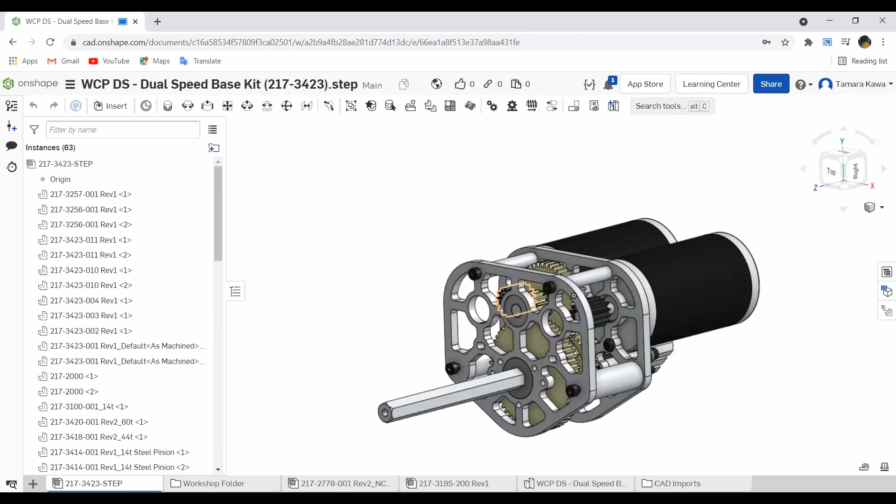Now, no need to panic. We're not going to be assembling the entire gearbox. That is a lot of parts. And given the fact that you're veterans, you all know how to do mates. I don't want to have you do the same planar and cylindrical mates over and over again. We're just going to be looking at assemblies overall here. So with that, you all have that folder where you made your plate, and we're going to be making an assembly now.

All right, so your assembly layout, you'll notice it's going to look something like this. You'll have things like the mate connector, you'll have your main mates. You'll also have this sort of gear relation here, you'll have slider mates. Keep an eye on all this. And another thing of note is you do still have the measure and the mass properties, but you're also going to have these 3 new tabs, the BOM table, configuration panel, and exploded views.

We're going to be looking at all of those today because, again, while I do want you to get practice with mates, I also want you to look at this workshop as a means of how we're going to organize things on the team. So with that, the first thing I want you to insert is the plate that you made. Again, completely okay if you don't have all the cutouts. As a matter of fact, I might even suppress mine since it's a lot to look at. The main thing that I really want you to have is these 4 holes for bearings and these holes for motors. Everything else, you don't need to worry about it. We just need these holes for now.

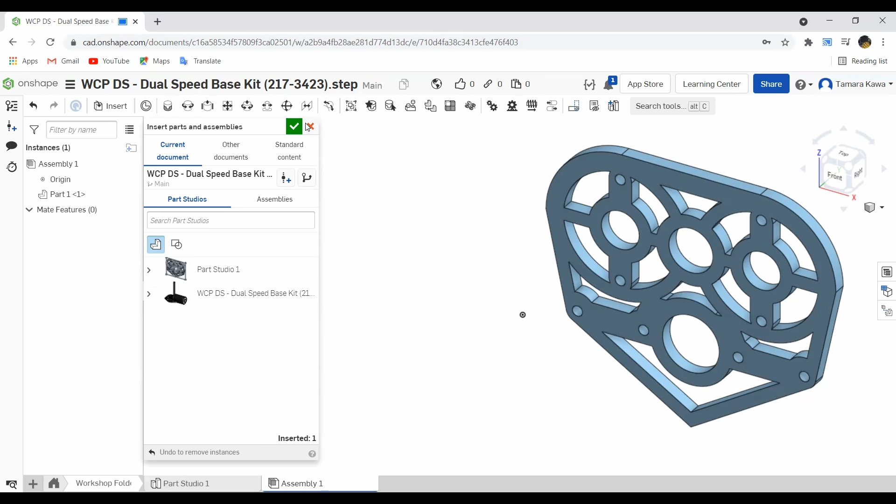Oh, also, as you notice, I'm a very bad CADder and I didn't fillet any of my sharp corners. So as you can see, this would not pass any sort of stress concentration reduction test. Like this is desperately in need of filleting.

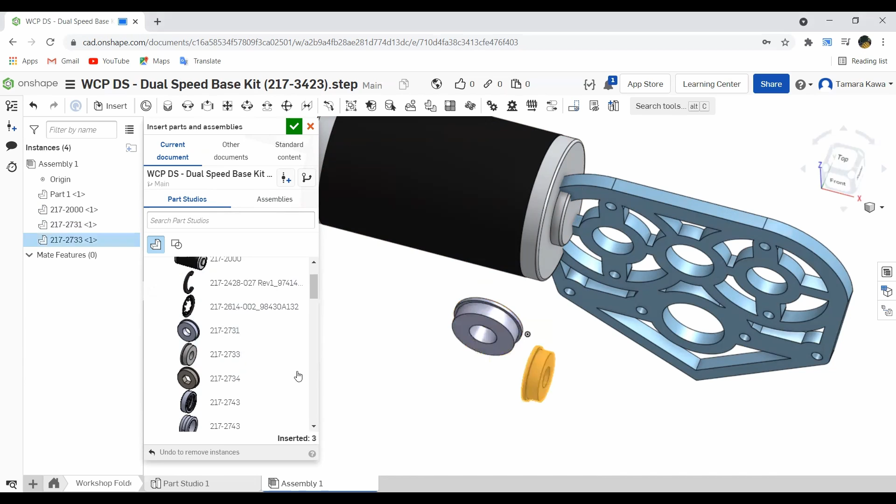But anyways, the other parts that you'll want to insert are going to be a motor. Again, we're not doing a full assembly, so just one for now. Let me check what else. You'll also need these 2 bearings over here, 2731 and 2733. All right, another thing for all of you to import are the gears. So the 30 tooth, 42 tooth, the 44 and 60 tooth, and the 14 teeth. Oh no, there's one more, because there's 2 14 teeth. So yeah, just import those and then you can leave them to the side or something. But just make sure you have everything loaded in.

Yeah. Sure. Right. Of course.

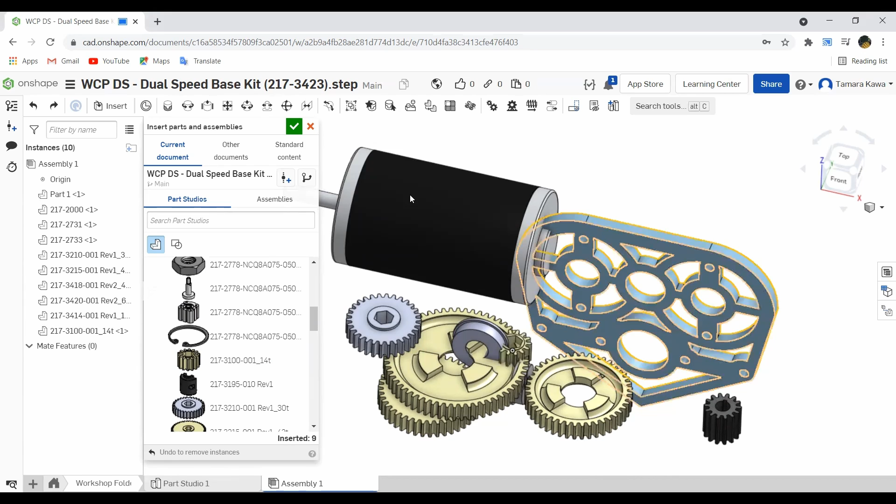So you just hit insert and then go down to West Coast Products DS dual speed base kit, and then you just click them in. So motor, these 2 bearings. I guess for now, leave it like that. I'm just going back and forth. So yeah, just remember to sign in.

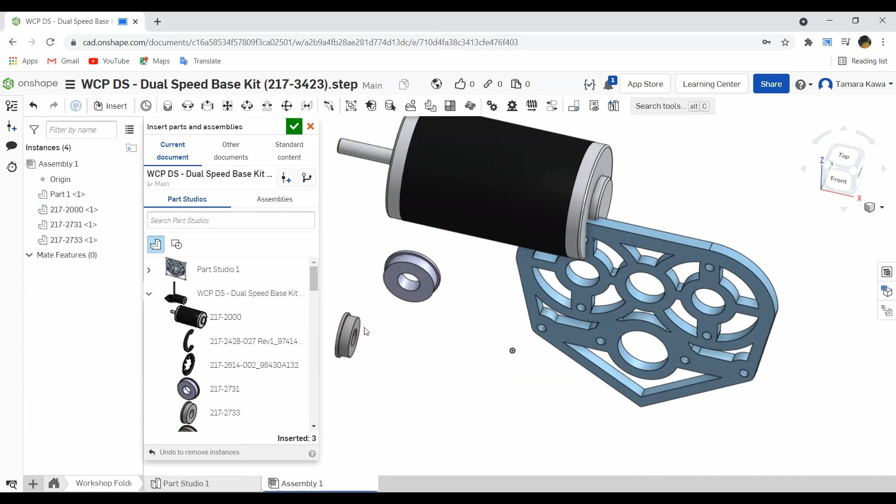Oh, one more thing I want you to do is once you have your parts imported, I want you to create a fastened mate between this gearbox and the origin. Actually, you know what? Why don't you discuss what point of the gearbox do you think would be good to constrain to the origin? Yeah, a lot of times, Onshape does take a bunch of resources. So if you have other stuff running in the background, it's good to close them.

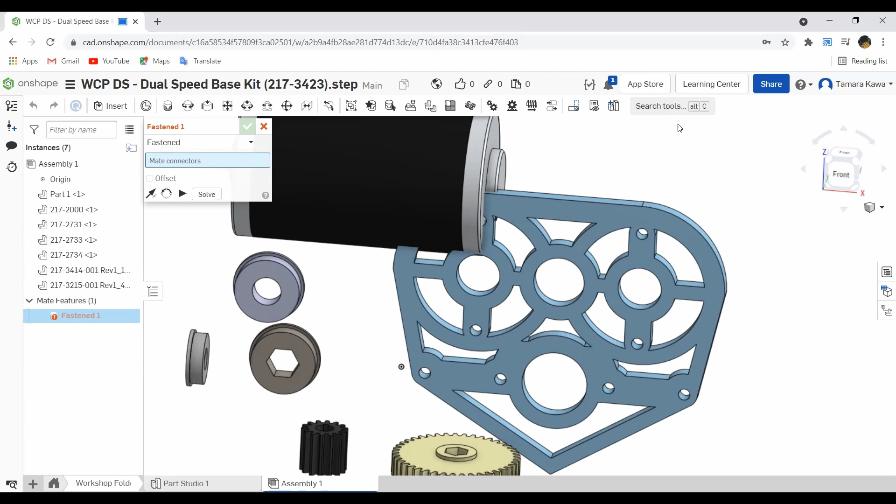All right, so any suggestions for what part of the gearbox do you want to fix to the origin? Sure. So we could do this top hole right here. It's the one for the center shaft. Okay. So I am going to go ahead and fix the center of that top hole to the, might need to rotate a little bit. I'm going to go ahead and fix it as such to the origin.

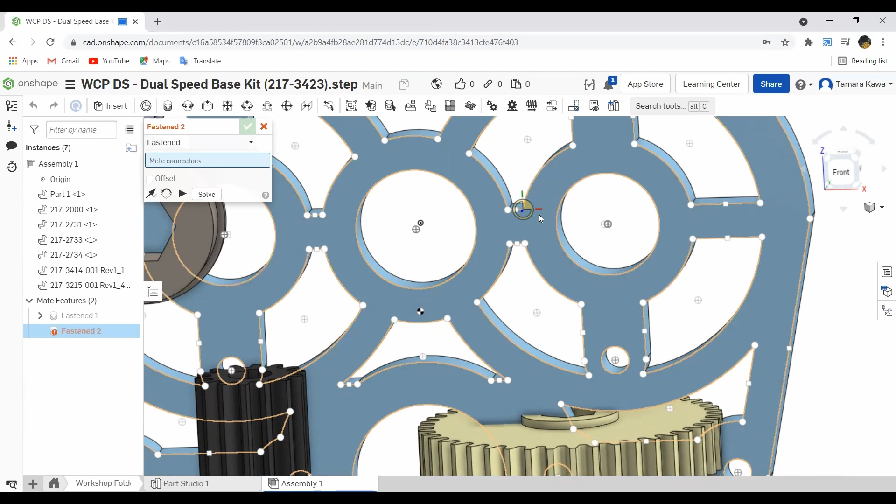So for now, I'm just going to leave it as fastened because in this case, the gearbox plate is rigid. The gearbox plate isn't supposed to be moving, it's supposed to stay in that position. And in this case, because a lot of the mates we're going to be making are going to be moving, we do want at least one thing to be static in place, not going to move.

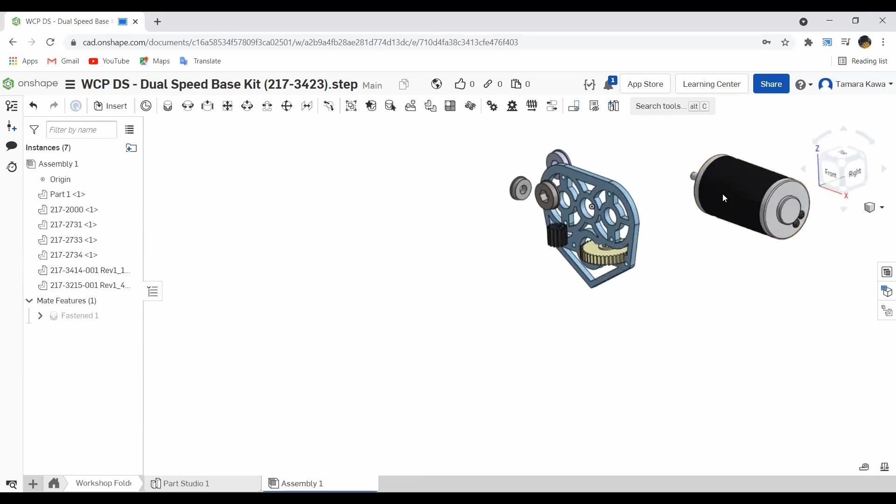So now that you have this fixed, another thing we're going to now mate is the motor. So do you think that the motor can be fastened, or do you think we need to do anything different with the motor? Right now, everything is just sort of freely floating in space. And oh, I forgot to tell you to import the shaft. That's okay, we'll do that now.

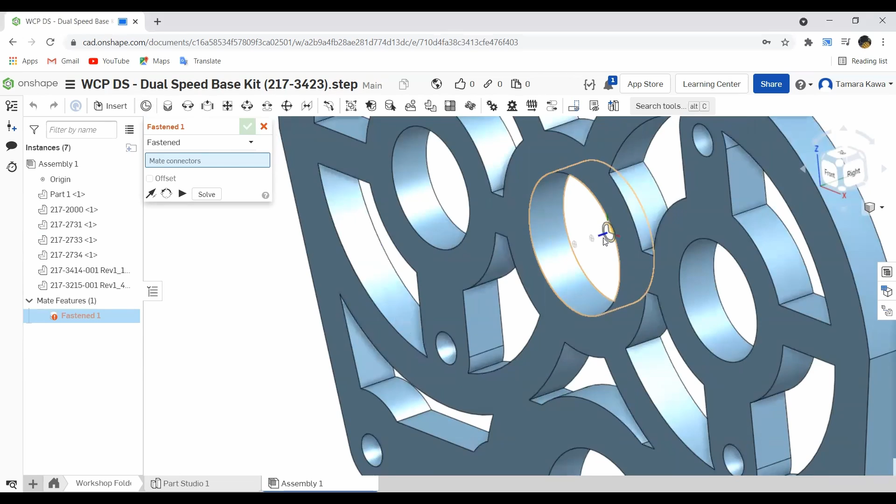So for now, I'm going to say fastened, and I'm going to sort of hover over. Yeah, because in this case, we want something to be rigid or fixed. So we can start with this plate. Yep, and then we'll sort of mate it to the center. Oh, okay. And yeah, there you go. And again, the reason we're picking this gearbox plate is because a lot of what we're assembling is going to be assembling to the plate. So it makes sense that this is the piece we're selecting to not move, be rigid, et cetera.

It'll change your axes, but otherwise it should be fine. Yeah, so just note that if I say, for me, the offset might be a Y offset for you or something. So just keep that in mind when you're orienting yourself.

Yeah, pick the top center hole, because even when we designed this part, we designed using that as our relative center. So now we have this motor here, and we have a gear that's going to attach to it. So let's mate the motor into place.

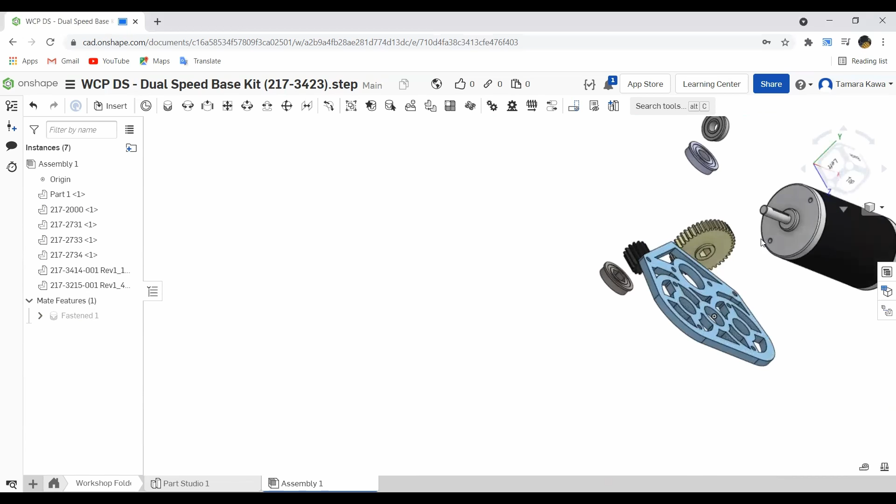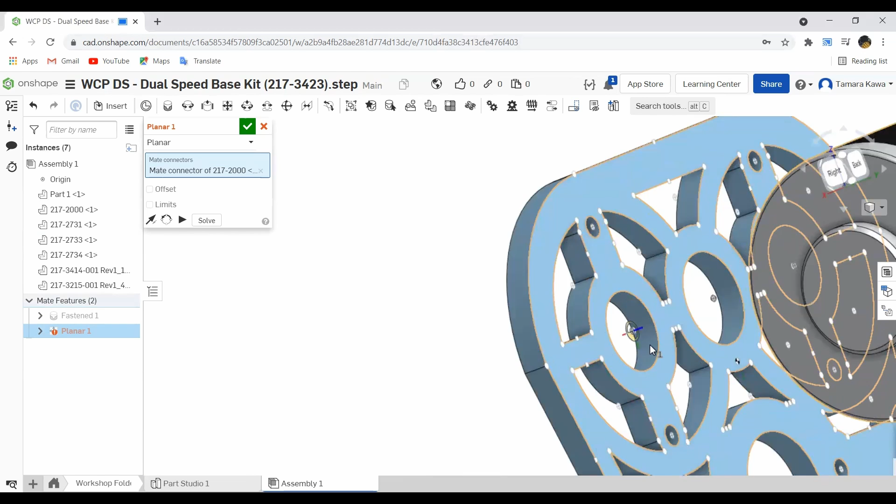Because we do kind of care about the orientation of the motor, I am going to say try to avoid using fastened mates, because again, in this case, we do care about the orientation. So we'll start with the planar mate, and we'll mate this surface of the motor to the outer surface of the gearbox as such. Hold on, it's moving on me. Okay, let's look at that.

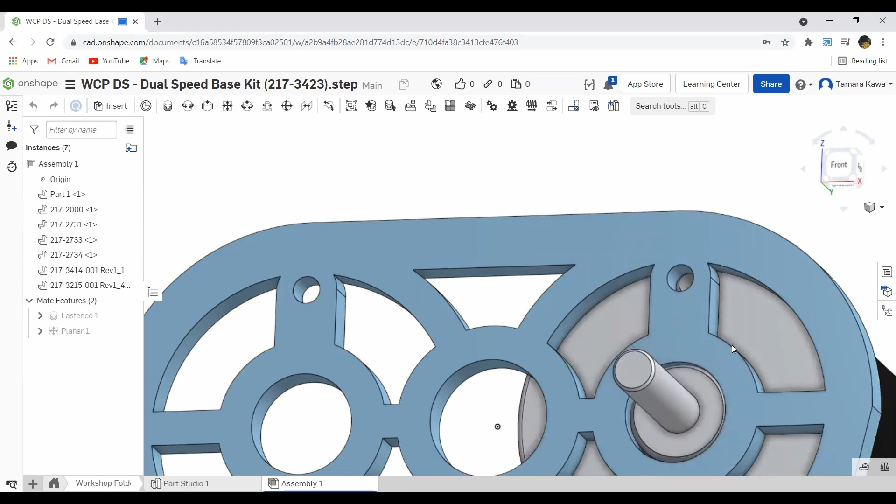And you'll notice that it's kind of snapping to the wrong side, so you can just use the arrow to flip the orientation and then hit the check mark and you're good. However, it is also not quite in the position we want it to be in, but you will notice that when you move it around, it's still moving while being in contact or at least coplanar with that surface. So now we're actually going to mate this so that it's in the orientation we want. To do that, we're going to start using cylindrical mates.

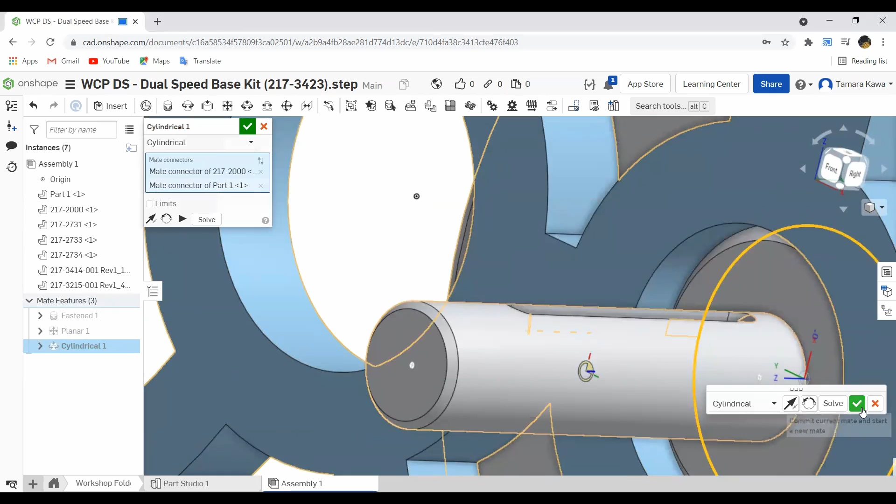The first one we care about is going to be this center part of the motor. We want that to be cylindrical with this surface right here. We want it to be centered with it. So that should be nice and centered now. But the other orientation we care about are these holes for the motor right here, because these need to be bolted in, right? So we're going to do the same thing.

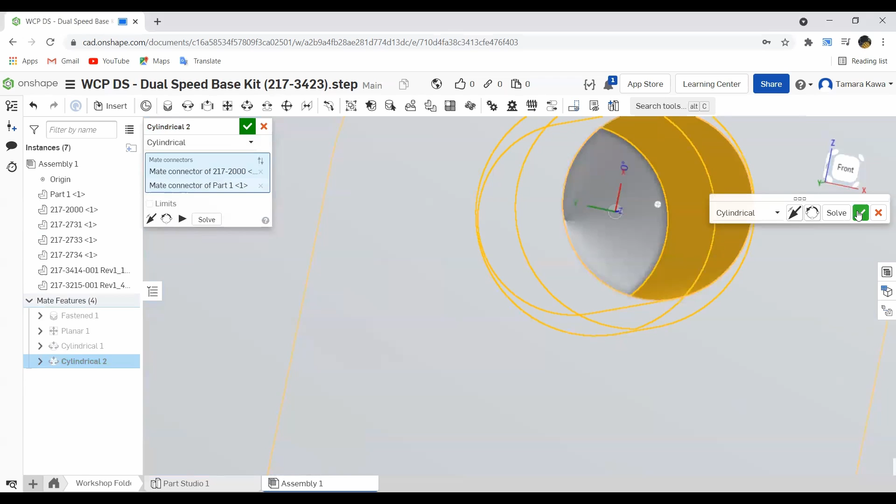We're going to create a cylindrical mate and mate it to the inside of this hole we created right here. And now those should be lined up. And if you hit the check mark and exit out, the motor is now fully fixed. It can't rotate, it can't translate. It is centered on that hole and the motor holes line up.

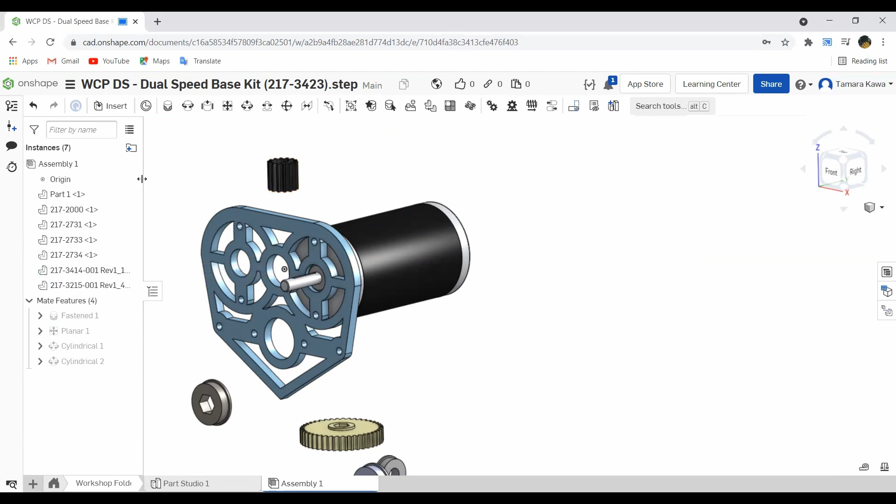What you should have right now is this gearbox plate should be fastened to the origin, and you should have a planar and two cylindrical mates so that the motor is sort of centered on these two holes of the gearbox plate. So next we're going to add this 14-tooth steel pinion gear. When you highlight over here, it should say 217-3414, 14-tooth steel pinion. That's the one. And we are going to mate that to the motor.

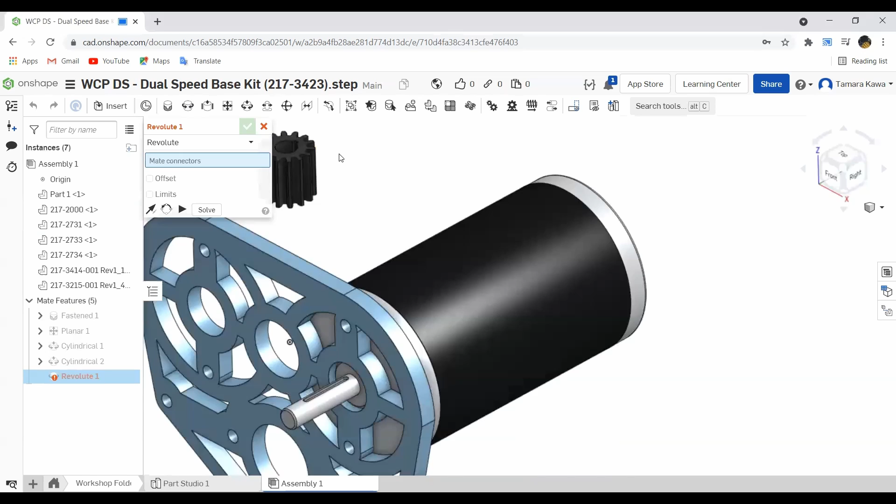But we do want this to spin, right? So if we just do a cylindrical mate and a planar mate, it's going to think it's rigid. That's not what we want. So we are going to do something called a revolute mate. And we're going to kind of go over the center as such, and we'll select this motor shaft as well, and it will snap to that position and placement.

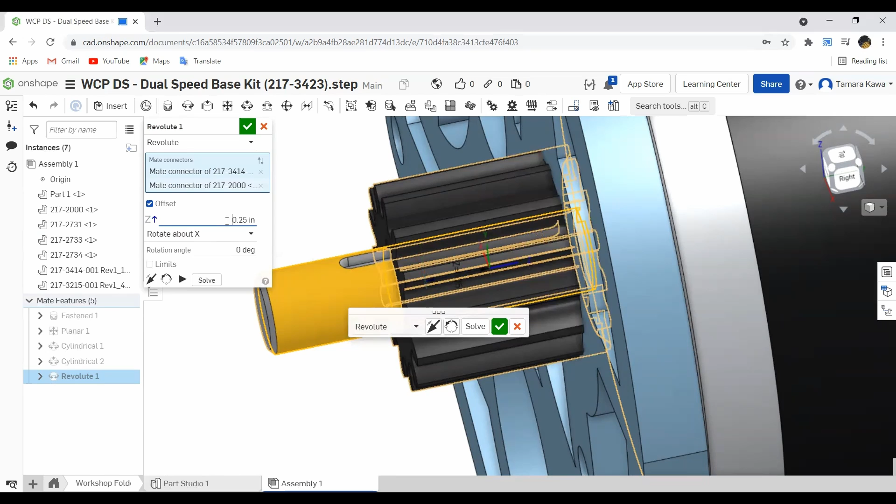Let's say I kind of want it to go a little bit forward. I'll select offset, and again, for me, it's the Z-axis. If you selected a different face of the origin, then you might have something different. I'm going to say 0.25 inches for now. Oh, let me reverse the direction of that. I know it's not much, but this is going to be important for something we go over later. Just do 0.25 for now.

Oh, let me show you. So if it's 0, then it's just sort of going to be centered on the shaft like that. So I said negative 0.25 to push it 0.25 inches forward. Yes. You can do that too. I guess you can add an offset anyways. The reason I'm saying the offset is so that we can use this later on for something I want to show you. All right. So yeah, I'll just mess with my dimension as well.

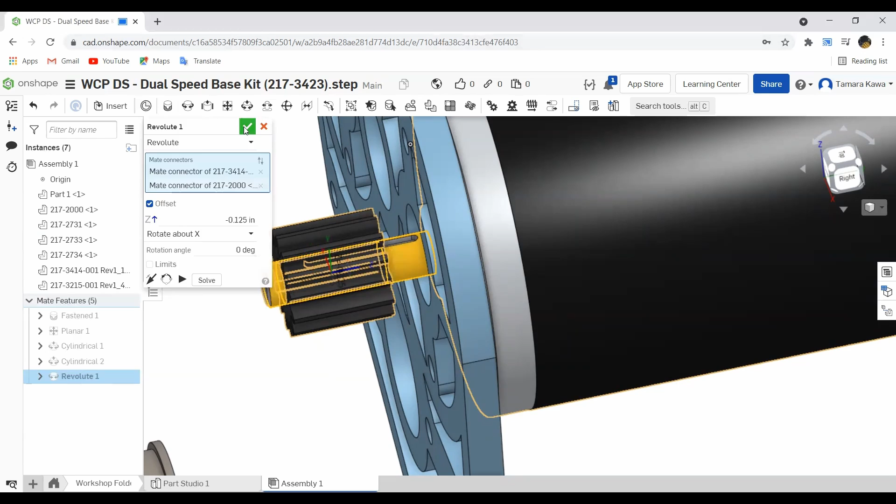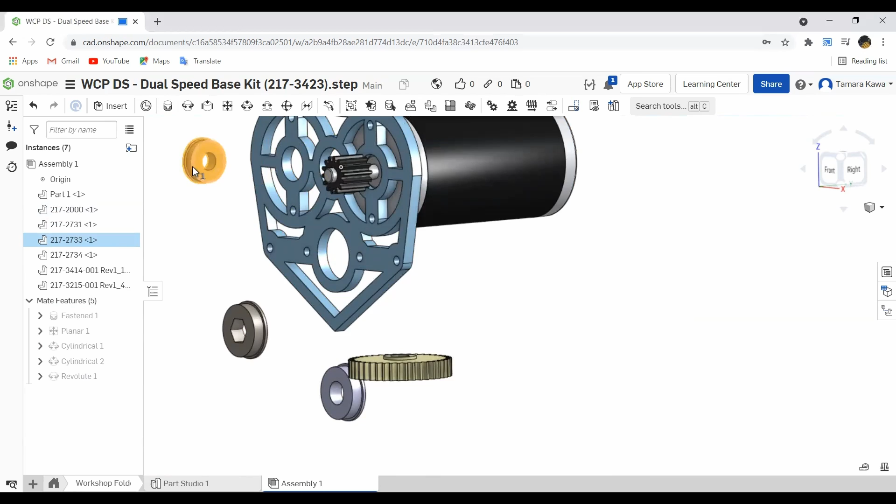All right, so you'll notice that this gear is sort of free to spin on the shaft. Normally I'd like the shaft to sort of move with the gear since there's a pin, but this is okay for now for what we're doing. So now we need to add, was it 3-1 or 3-3? I think it was 3-1. No, it was 3-3. So we're going to go ahead and move this bearing 217-2733. And we're going to mate that as well.

Now, in this case, I think we can afford to use a fastened mate, because while something is turning inside, the bearing itself isn't going to move. So for the sake of time, we'll say fastened. Again, sometimes this is actually... no. Actually, what do you guys think? Do you think we can have this be a fastened mate, or do you think we should do planar and cylindrical?

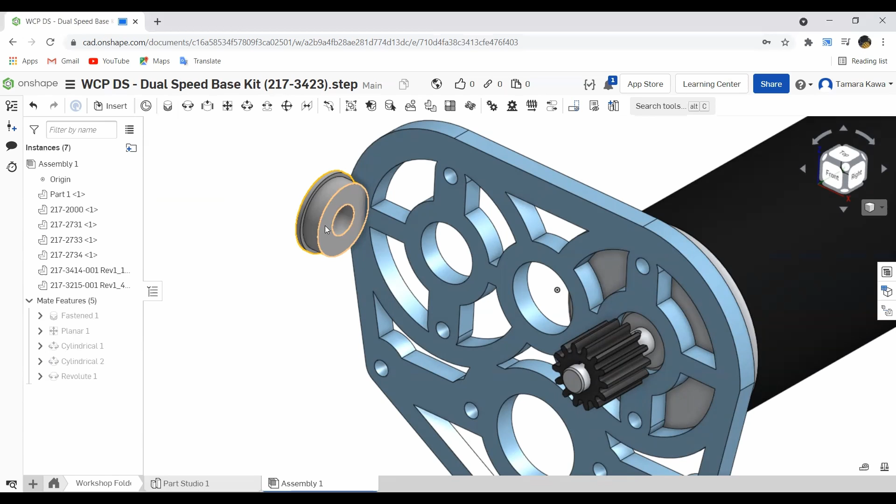Fastened is going to completely remove degrees of freedom, while planar and cylindrical would first mate this plane to that plane, and then make it so the circular surfaces are concentric. It won't be able to... So I'm glad you're asking this question, because this is a case where we could potentially just do fastened. For something like the motor, because the orientation actually matters, and because we want to make sure the holes line up, that's a scenario where I'd say don't do fasten, but for this, we might actually be able to get away with it.

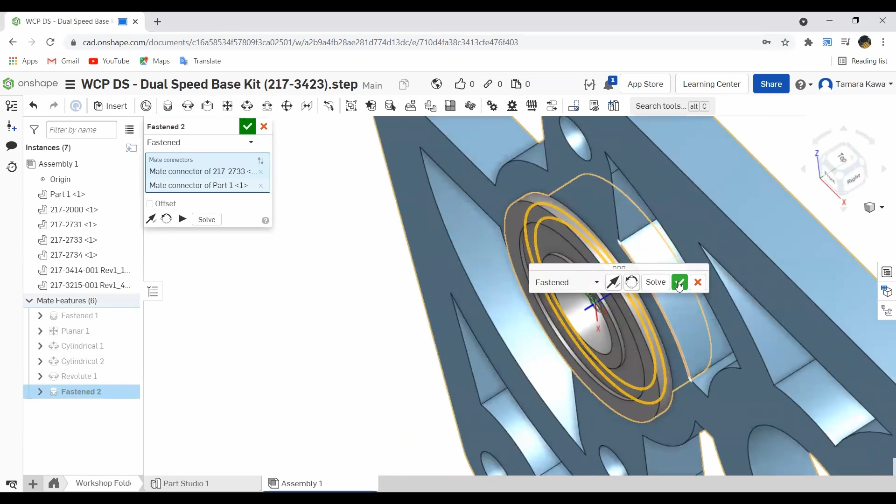All right, I will do this mate and then come to you. So I guess we'll just do a fasten for now, and I am going to fasten specifically the end since we also want some level of flushness. So I'll do this surface right here at the flange to this outer surface right here. We'll flip that rotation, and that's it. So you should have something like this for now.

Where... oh, wrong hole. Fortunately, we can go in there and change that to the correct hole. There we go, that's the right hole. So you should have something like this.

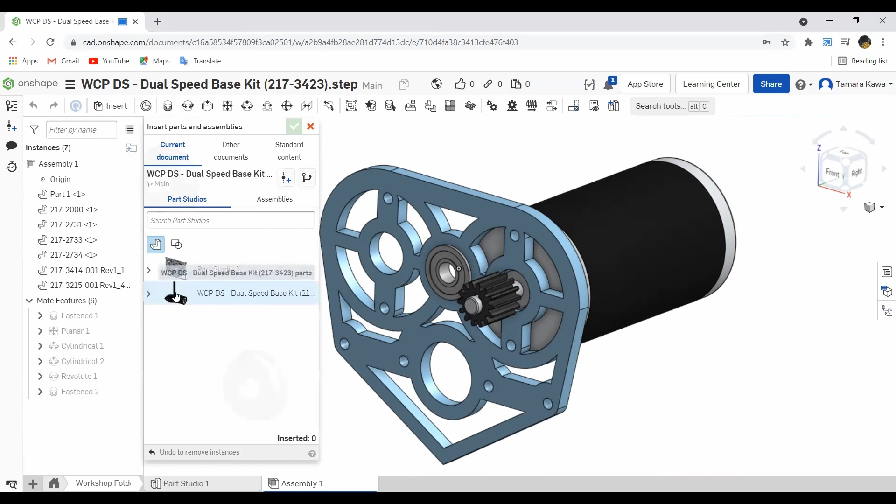All right, so there is one more thing that I forgot to have you pull in. I'm gonna have you pull it in right now. There are gonna be two shafts, I believe. That's not a shaft, we're gonna have to kind of go down. Let's check this one. Yep, this is it.

So you'll also need to pull in 2173423-002. And we'll skip the dog gear for now, that's going to be kind of a headache to deal with. And 2173423-003, just one of each. So 2173423-002 and 2173423-003. So we're going to do this next.

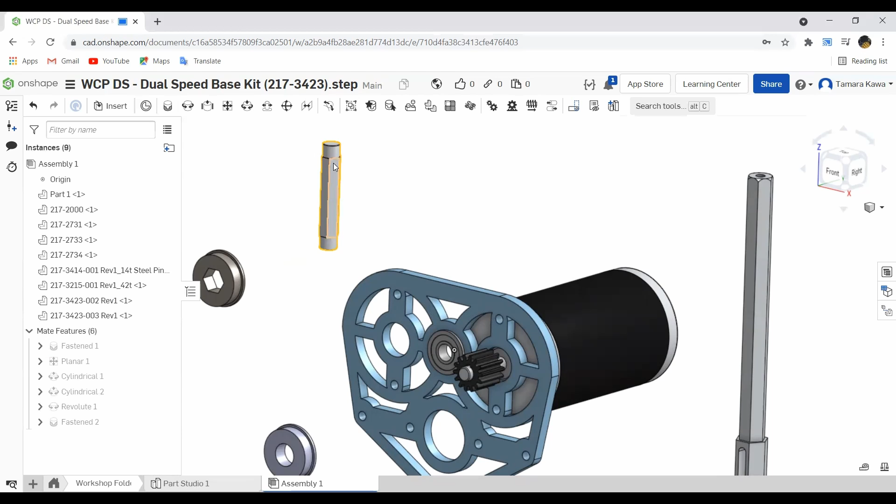We're going to do a revolute mate of this shaft, because this is a case where the shaft is actually spinning. We're going to start by doing revolute again, and this time we're going to go with this sort of interface right here, since that's what's going to be sitting, and we'll do it with this bearing hole as well. Reverse direction as needed so that the shaft is sticking out like that, and hit the check mark.

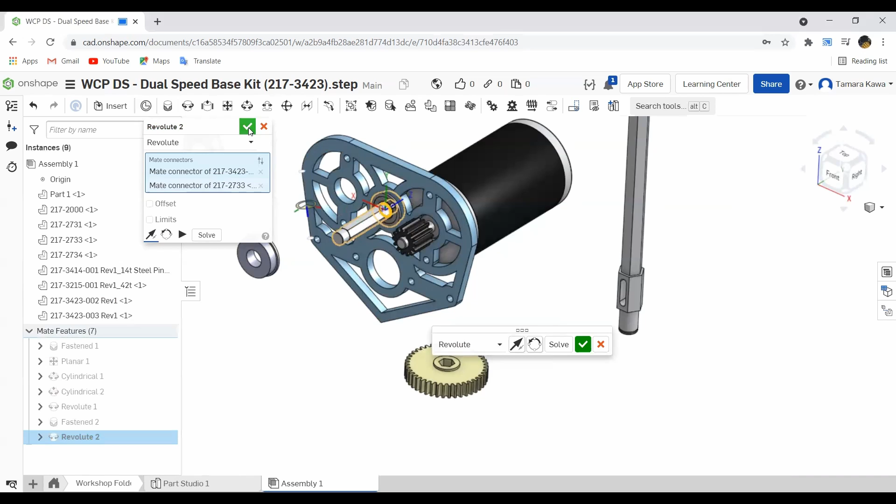Now we are going to take our 42 tooth gear, and this is going to be a bit complicated because we have a hexagonal pattern, but we are going to mate this to the shaft as well. Generally for something like this where it's hexagonal, I like to take two faces of the hexagon that are ideally touching, or just one face apart, and then mate them to corresponding faces over here.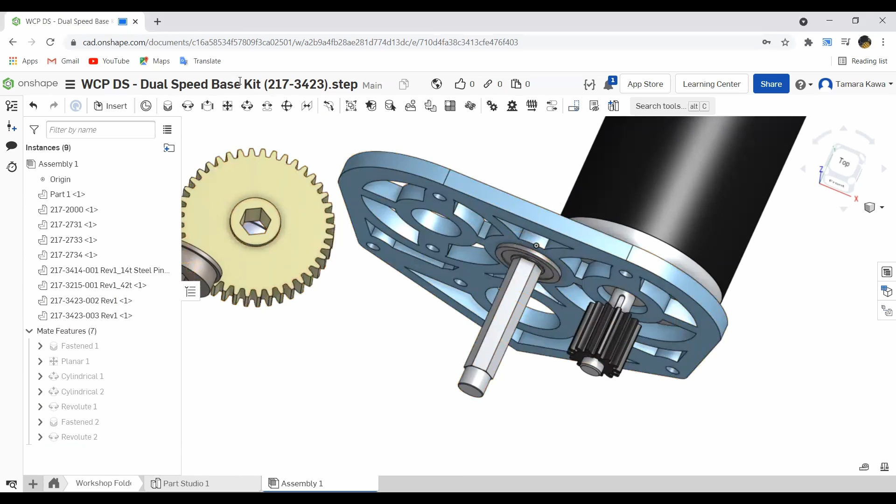Okay, so we're going to do a planar mate, and we're going to take one surface - remember which surface you picked - and we'll do the top surface of the shaft. And then hit the check mark. Oh, nope, I needed a reverse direction again. It's okay, you figure out these things as you go.

So yeah, you might need to do a lot of direction reversal. It's gonna look like it's in the right place, but it's actually not - as you can see, it's still kind of turning. So what we're gonna do is kind of drag it out like that, so you can tell what orientation you're going for.

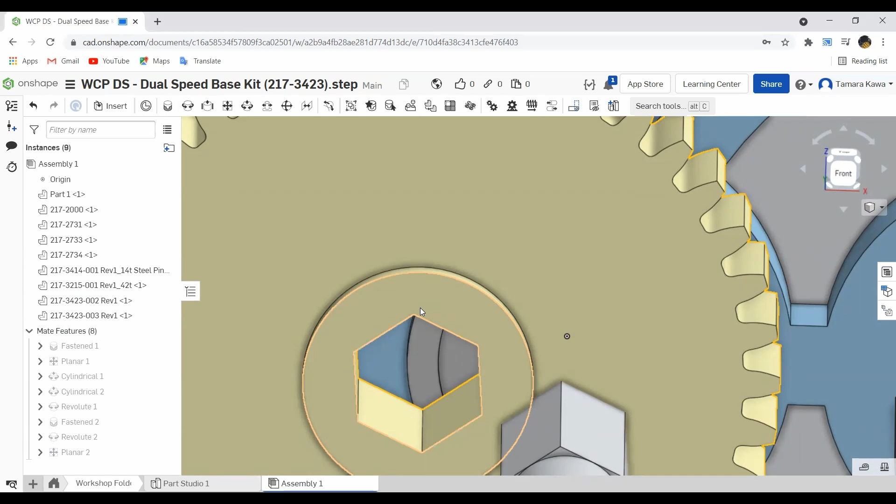For planar, I don't believe it does. I like to use the center of the plane, but if you use the edge, I think you're also okay, because so long as you're coplanar with it, you know. So based on how I move...

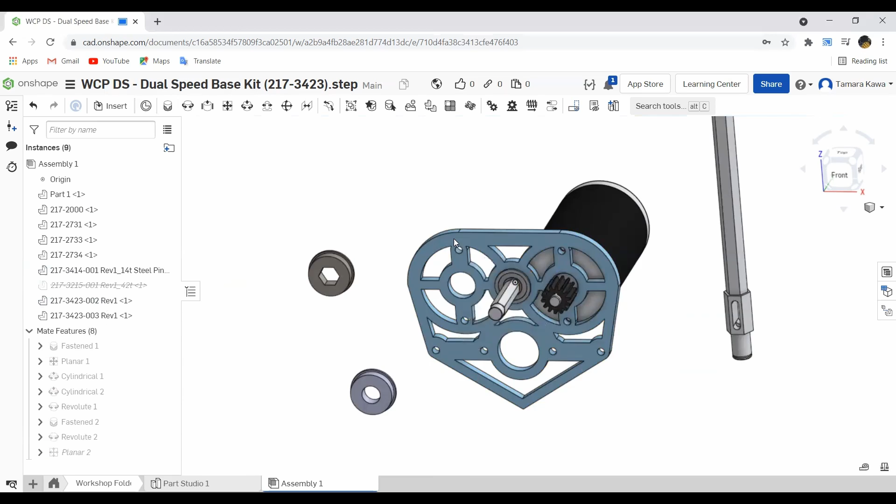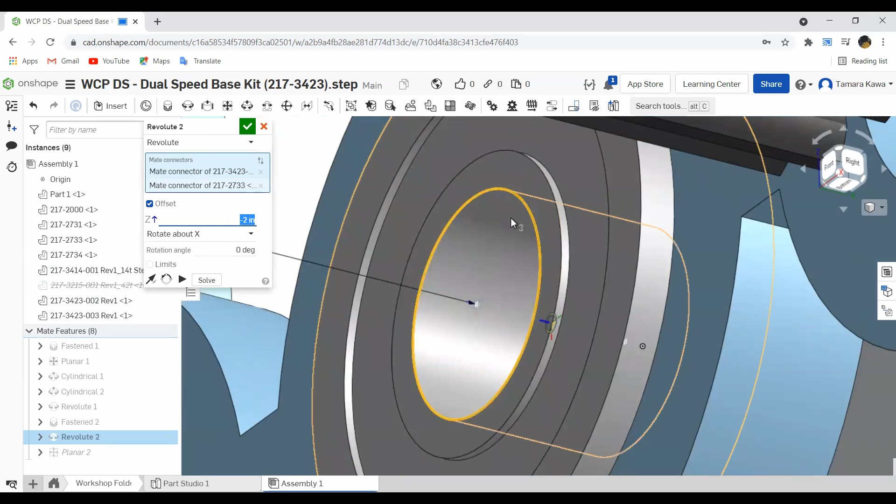So to refresh on the mate you're supposed to use, I did a revolute mate for the smaller shaft, and I specifically selected - here, I'll offset it just to show you - so I selected this face right here, the end of the hole, and I selected this face, like kind of like that, if that makes sense. So I selected the top part of the cylindrical part, and then I selected this outer part of the bearing.

All right, and okay, let me unsuppress my gear. Yeah. All right, so it is, yes - because that removes all degrees of freedom except the rotation along one axis, and that's what we want. So I'm just going to make sure I select my right coplanar, and I'm going to go ahead and select this one right here.

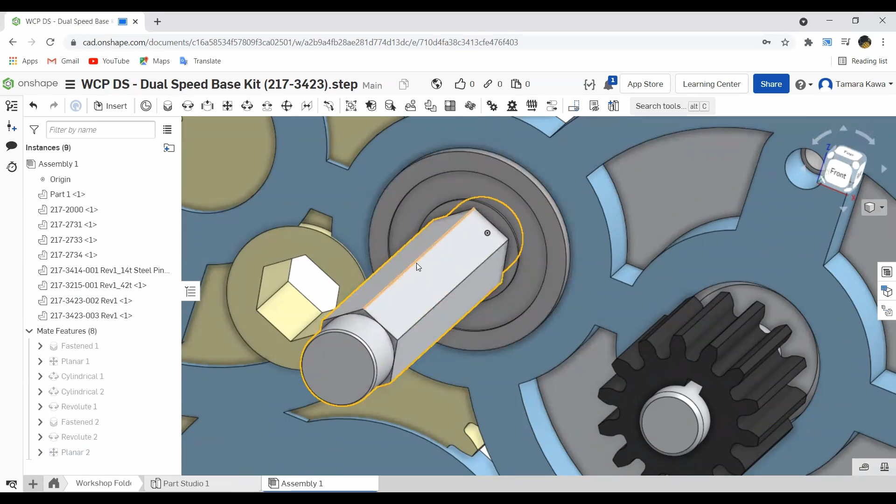To mate it to the shaft, I'm using two planar mates, so I'll show you one of them again. All right, so there we go, so just to check - move that in, yep. So these planes are already coplanar.

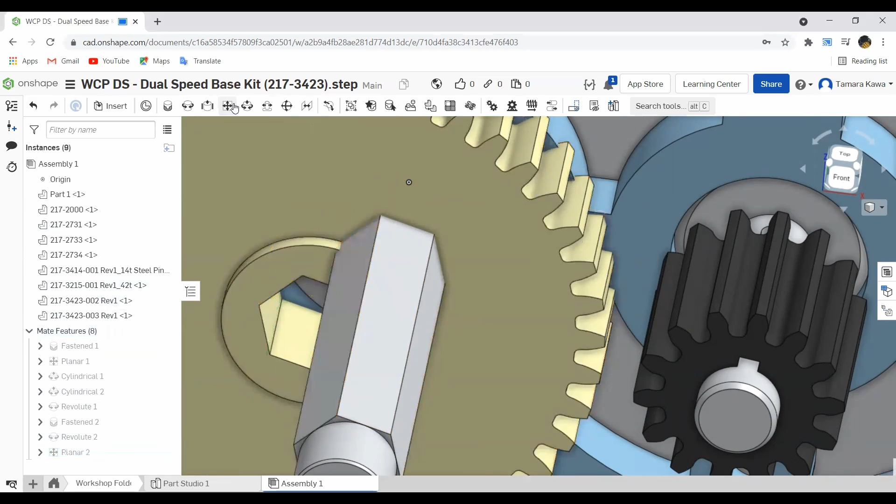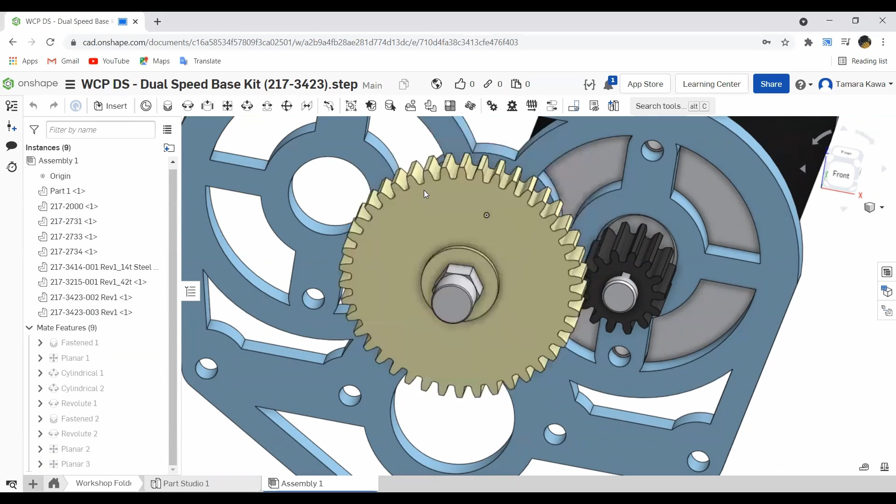So we're going to select another planar mate, but we're going to select this plane here and this plane here. And now that it's constrained by two planes, it's basically constrained in all directions except its rotation, which again we want, and the actual translation of the plane. So we're going to have these two gears be coplanar with each other. I'm just going to hover over until I get roughly to the center of the gear.

Sometimes it helps to sort of... there we go. And then I'll select this gear as well. It's going to move, that's okay, because it'll move back, and then click the check, and now they are coplanar with each other. But you'll notice that both of them are free to turn, but they don't turn with each other, right? And that's a bit of a problem, because they're gears, they do move with each other.

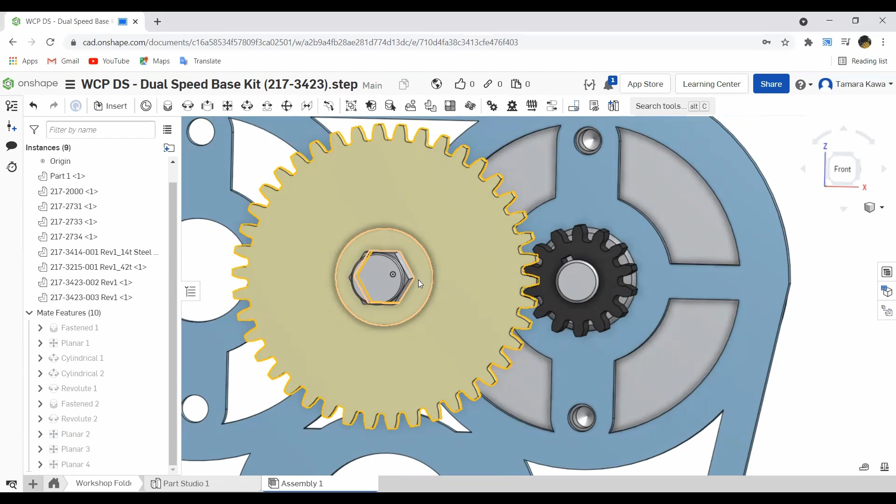So once you get to this point, we're going to add in another mate feature. Okie dokes, that's by popular demand. We're going to be redoing the gear mates here and here. Okay, so this duder is just floating around in space, and we're going to mate it into place.

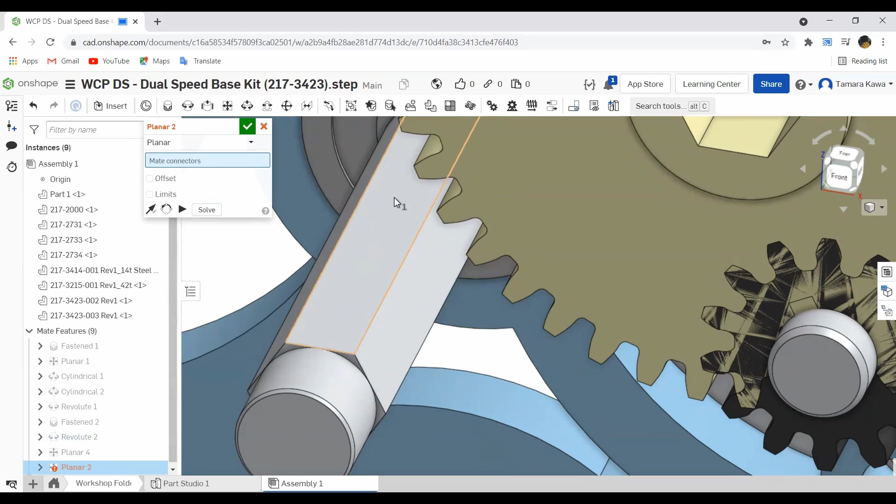So we'll select planar mate. So we'll select this top surface of the shaft, and we'll sort of rotate and select this top surface of the gear and make those planar to each other. But we still have a degree of freedom, so we're going to select an inner face of the gear, and we'll select an interface, so this outer face of the shaft, and click the check mark, and that's it. So it's literally just 2 planar mates.

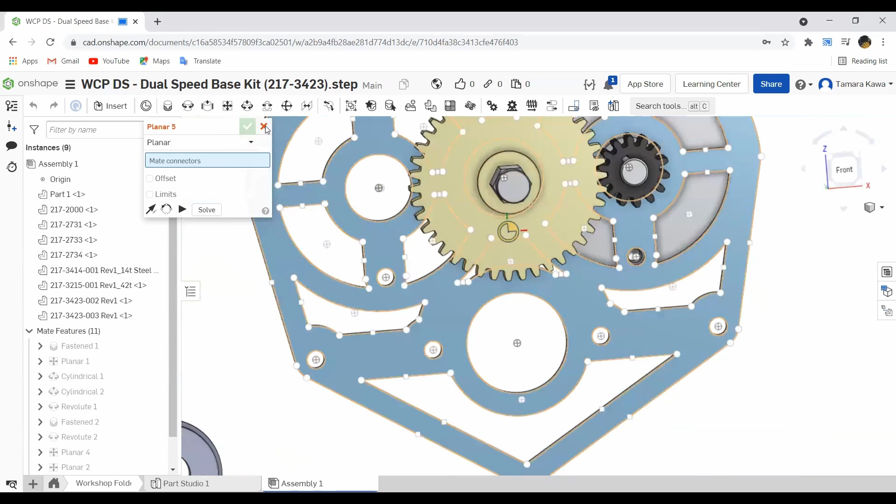No, you'll have to drag it and kind of rotate it if that helps you. Alternatively, setting the planar mate first to the other gear might be helpful too. And remember that if your gear teeth are not quite lining up, you can always sort of drag it into place for now, but there is a bit of rhyme to this reason.

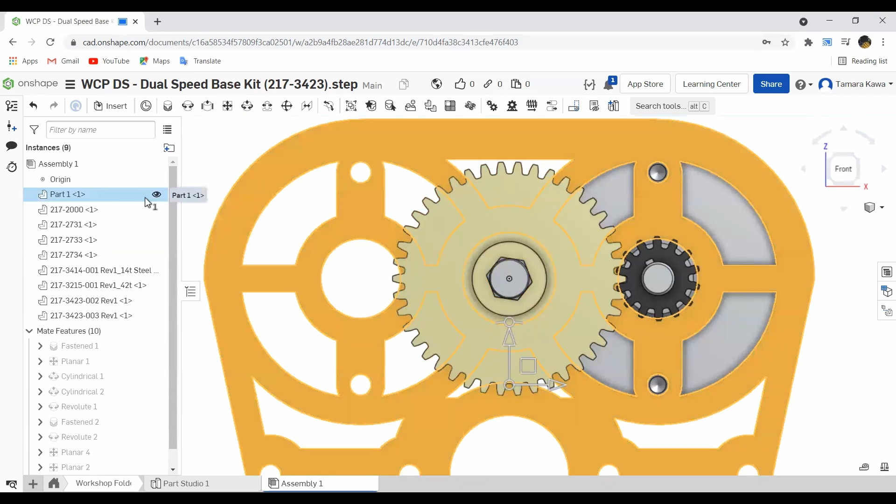So another thing I wanted to highlight is you'll notice that the alignment of the gears kind of matches up with the circles we made last time, right? So if I go to part 1 and I say... I cannot show the drawing, that's unfortunate. But if I superimpose the original sketch we made of the plate over this, you'll notice that the dimensions line up.

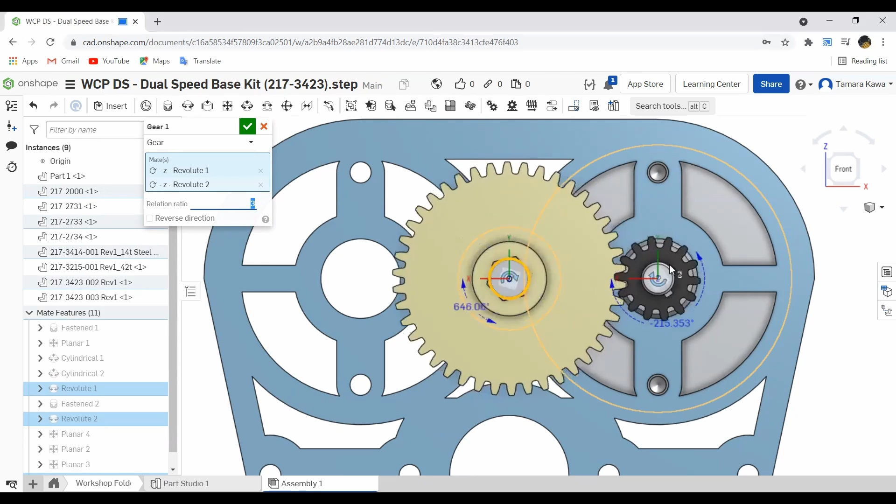And let's just make sure this... oh, what's this? Why is the larger gear spinning so much faster than the smaller gear? Isn't that backwards? It's moving together, but also one of them is moving a lot faster than the other.

So normally when you have a big gear and a little gear, which one is rotating faster? Yes, and can you explain why?

Okay, so what we're going to do is we're going to rotate that. See, when you click on it, it can rotate. So let's just do that. And let's go 90 -- you can just type 90, hit enter, and it'll do that for you. And now it's going the same direction as that shaft.

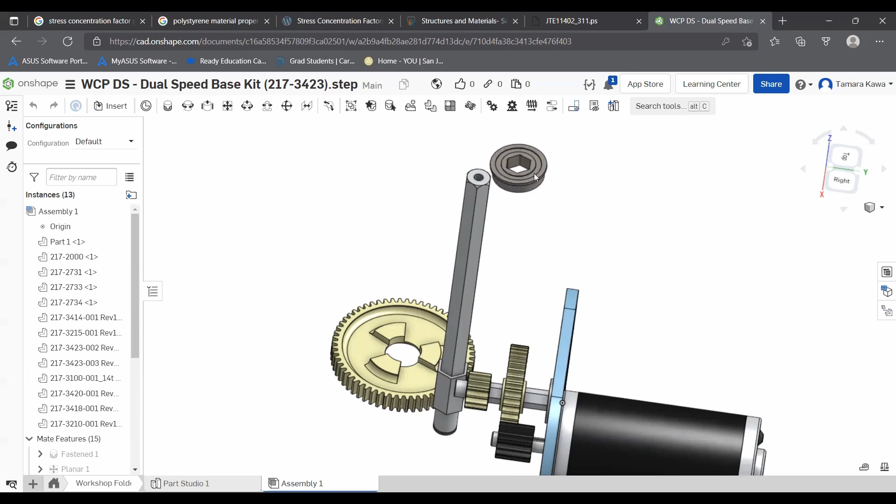Now let's try doing a mate. So planar mate, this side, rotate, and that side. There we go, that's better now. But we still do need the other plane here to be mated, because as you can see, let's go from this view, it's constantly touching there, but not everywhere else.

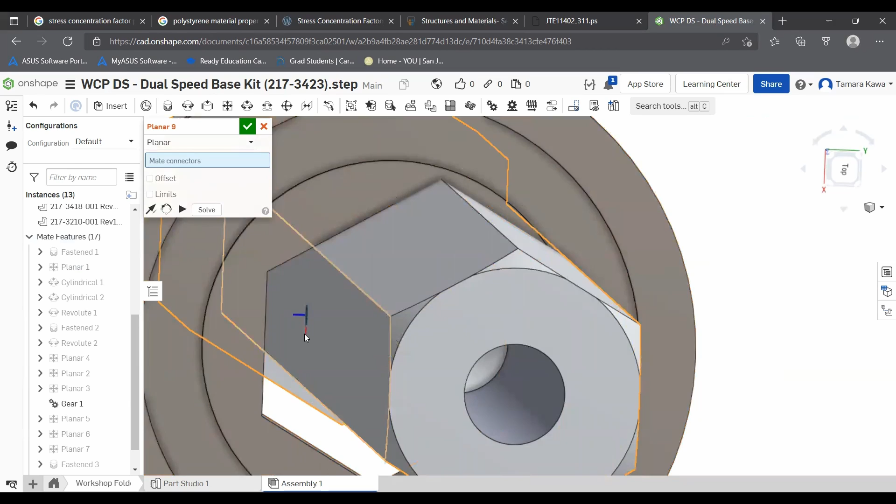So we're gonna take this surface as well. Yeah, be careful about selecting. We're gonna take this surface as well, and we're gonna kind of zoom in here. There we go. And now it can go in and out, which is fine for now, because what we care about is making sure that it's planar, because otherwise once it rotates, it's going to be kind of gnarly to get on.

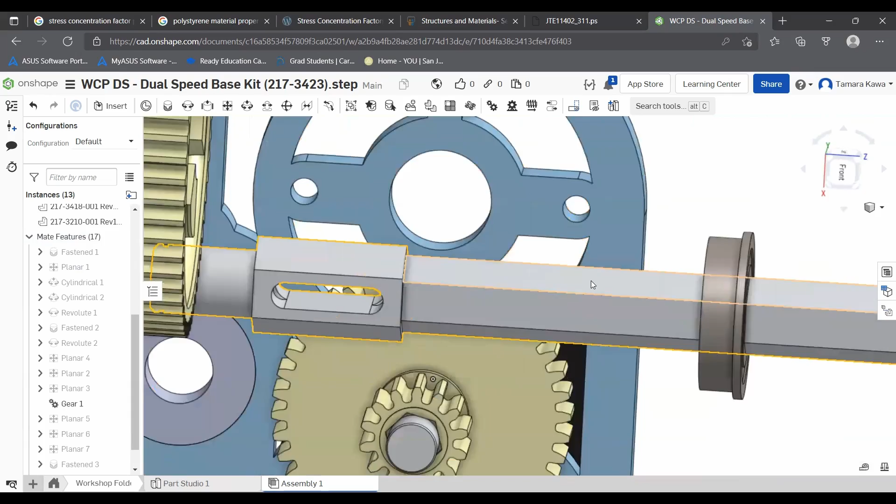So, oof, lots of rotating here. Let's make this revolute to the bearing. So to do that, we're going to click on our good friend revolute mate, and we're going to click on the areas that we want to be properly distanced from each other. So in this case, I'm going to select this hole, well, this sort of line right before the groove, and I'm going to select this side of the bearing right here.

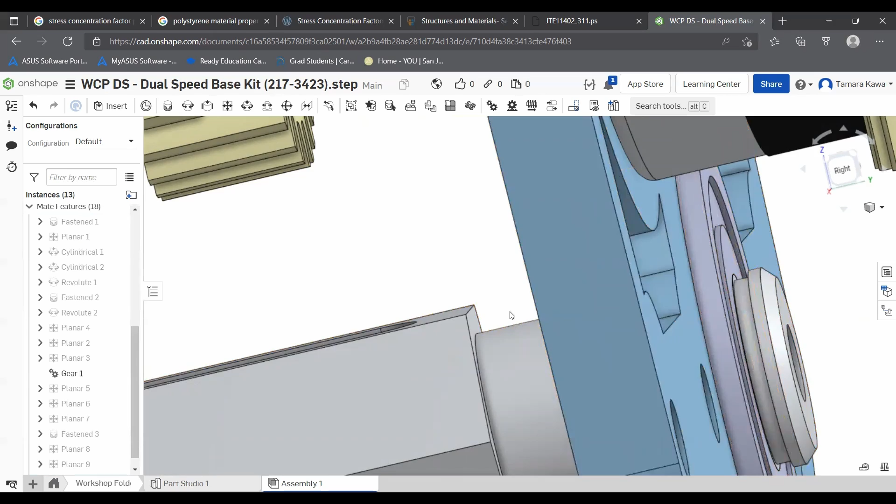That's not the orientation we want, so we flip it. I want you to notice how when I hit the check mark, there's this little groove sticking out, because that's where the snap ring is going to go.

You'll notice that they're kind of rotating together, huh? Isn't that nifty? It is nifty. It's very, very nifty. I like things that are nifty.

Now that we have this bearing on and it's kind of spinning with the shaft, let's actually put a gear on this guy. Let's put the 60-tooth gear on this guy.

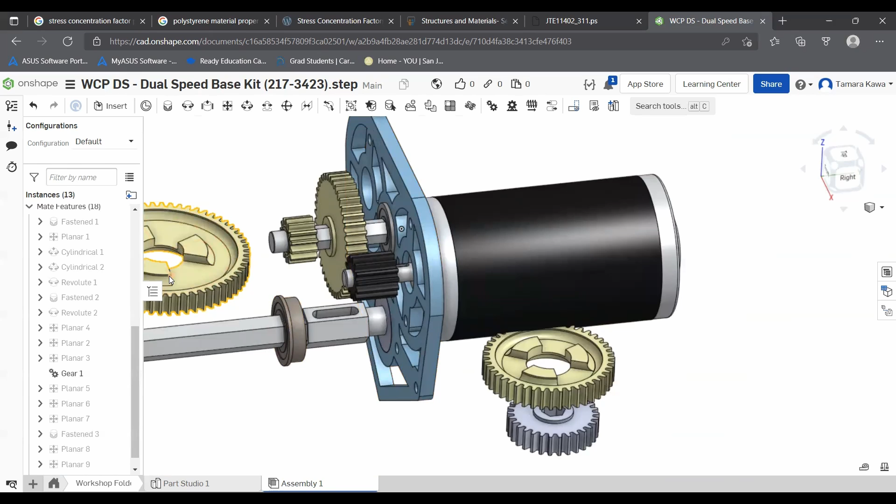So we're going to do a mate, as we do. I really don't want this to be a fastened mate, so we're going to do that planar and cylindrical mate again. The reason I don't want this to be fastened is because it limits the degrees of freedom, even though we do want this to be turning.

So actually, you know what? Let's try a fastened mate. Let's see what happens. I'm going to say fastened, and I'm going to go ahead and select this inner surface again, as we do. Now I am actually going to select this outer ring right here. Cool, so that checks off.

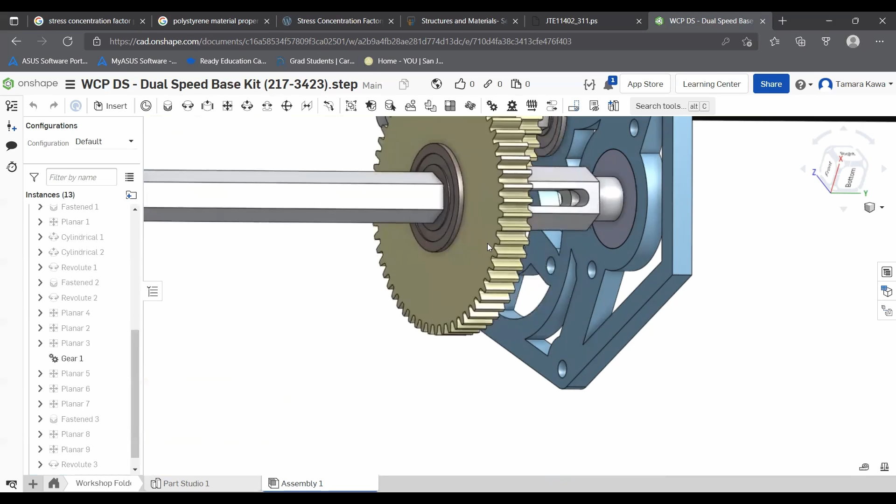Oh, actually, I guess it is fine. I see. So I believe the reason that this works in this case is because we don't care about the gear's orientation relative to the bearing, since they do move together. Otherwise, it would be a problem. Like here, you can't really fasten it properly. You could fasten it to here, but what we care about is that it's touching these inner surfaces here. In this case, because we have cylindrical, yeah.

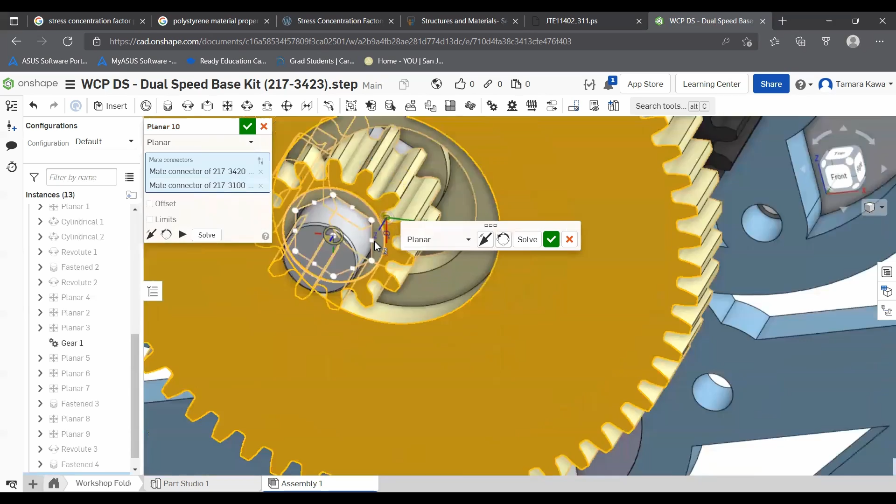Now we also need to create a planar mate and make those two surfaces planar. It did move, but did it move for good? It did not. Now let's just go ahead and get this into the right position. Yeah, there we go, there we go. I like that. It's wonderful.

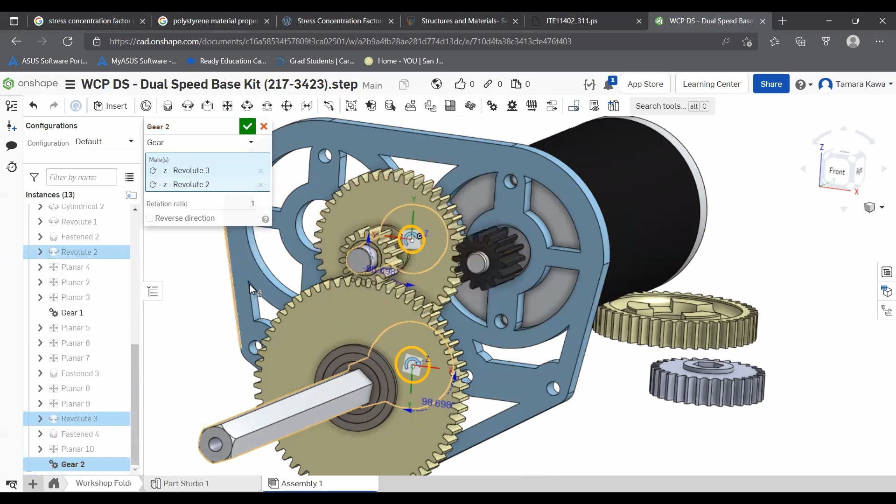Let's make them spin together. Now, what do we remember about the order in which we place our gear relation? Let's see what happens if we take our third revolute first and then our second revolute. And those are touching in a way that, there we go. Now that's in a good position.

Remember that the relation is 60 teeth to 14 teeth. So let's say 60 divided by 14. No, stop that. They're not supposed to do that.

All right, well for now let's test that out. Yep, that looks about right. You'll notice that the slowest spinning one is the 60-tooth gear right here, and the 14-tooth gear is just going really fast. It's a zoomy gear.

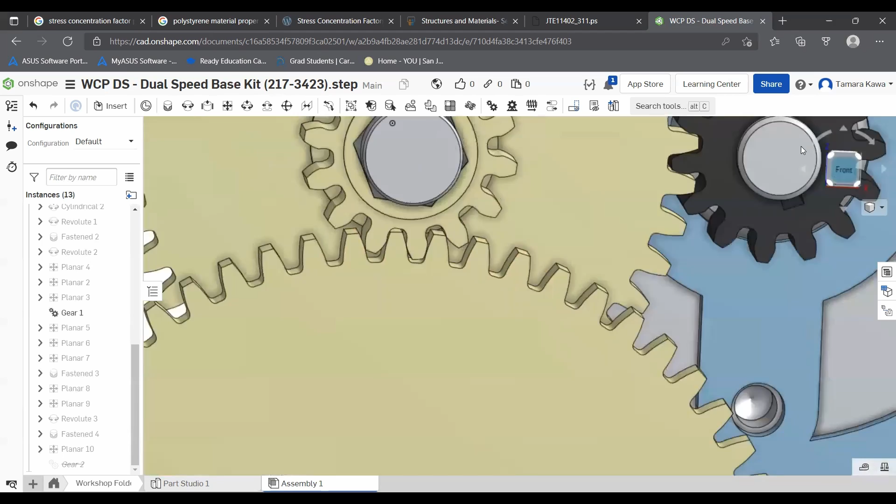I'm going to suppress that for now, just so that I can move these into the same position. Let's look at it head on by clicking on front plane. Zoom in. That looks okay. Let's unsuppress. Really? Okay, let's go into there and see what we can do.

Okay, so I'm actually going to change that number a little bit. Really? You're not going to let me? It's just a matter of orientation, isn't it? How do I get you to behave?

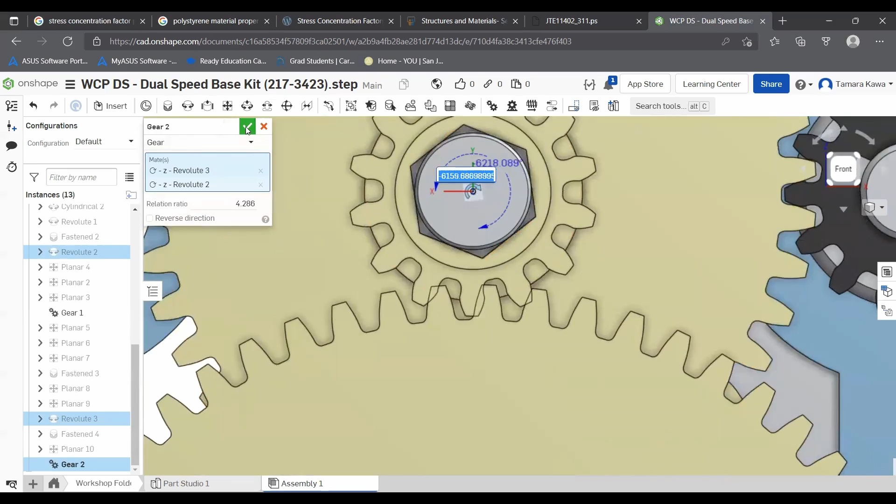Well, whether or not it behaves isn't really as important, I guess, because we know that if we disable the mate, we can get it to fit properly. So I'm not too worried about that.

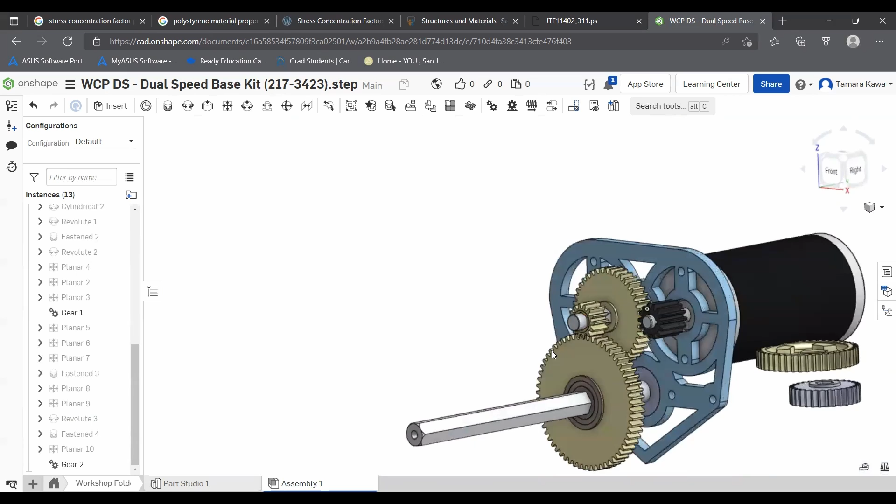So with that in mind, let's take a look. Yep, it's working just fine. Now let's create a second version of this with these two gears. So as you know, you have a configuration panel right here, and we actually don't care about this so much.

So I'm going to go to planar 7 real quick. Planar 7, let's edit, and let's right click this and say unconfigure. We don't care. It's just going to say point on planar 7 for now.

What I am curious about, though, is this one right here, because we did control this one in class, and this one's not quite as important given its relative size to that. So let's see what happens if we find its planar mates. Perhaps it's planar 4, not quite. Let's try planar 1. Where did the planar mate go?

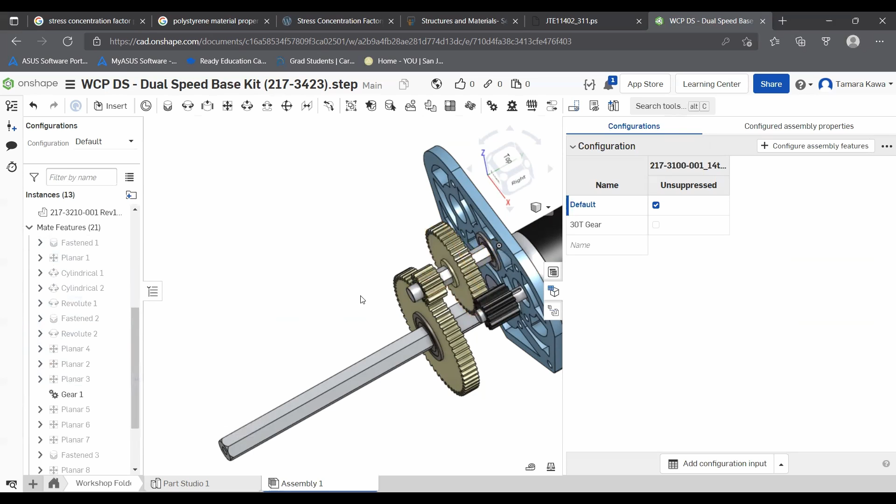Well, in situations like this, there is another thing we can try. I'm going to close that configuration tab. I'm going to right click this, and we're going to say show mates. Interesting. Interesting.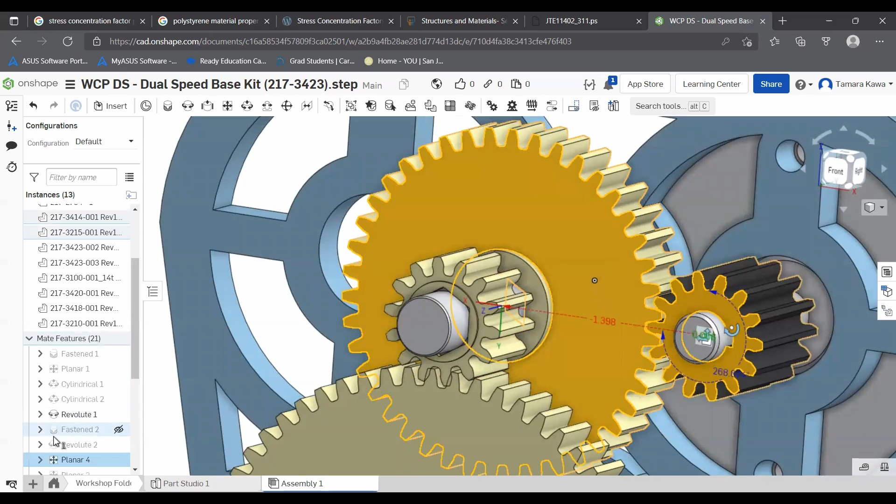It seems as though the mates that are on it are that it's planar to this, but not to that. So let's check out this planar mate right here, planar 4, and edit that. Let's add an offset of about 1 inch.

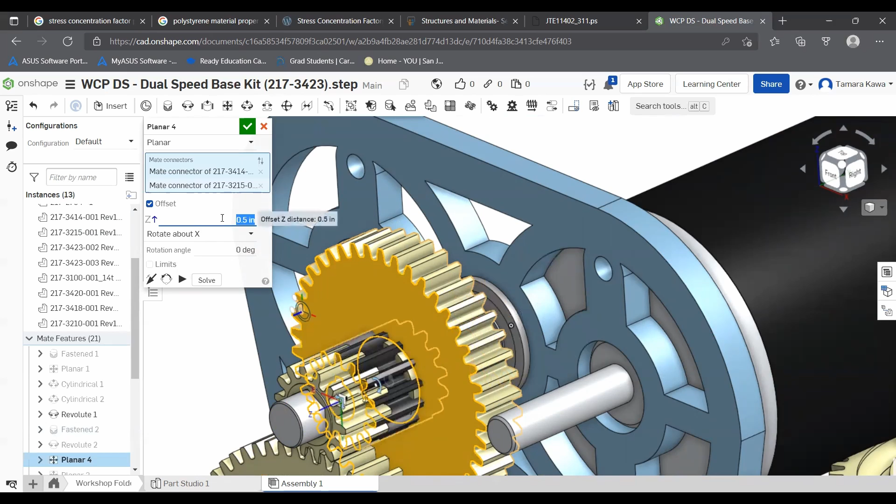That's not quite what we want, is it? Let's try -1 inch. That's way too far back. Let's try 0.5. All right, is it fully... 0.25? Yeah, there we go.

All right, so now let's go to planar 4. I want you to configure this distance, that way we can see a visible shift when we switch from one configuration to the other.

Again, I'm not saying we should go about doing this in real life. I'm not saying that this much distance or however is okay. This is mostly for educational purposes.

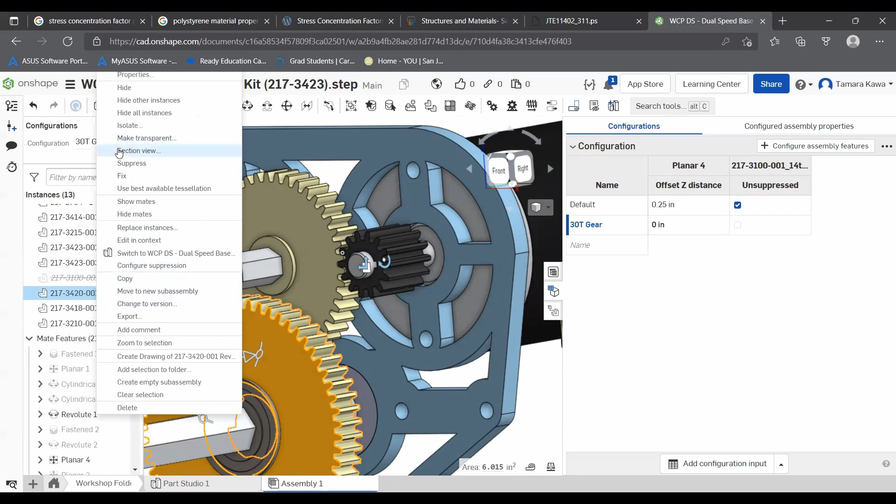Anyways, speaking of education, let's go back to our configuration tree. Let's switch over to the 30-tooth gear, and let us also configure the suppression of this part. So we're going to go over here and say configure suppression. And for 30-tooth gear, it is...

Suppressed. So now we're going to go back and do the same thing with these two gears. You're going to be mating this guy to this shaft the same way. You'll be mating this to this bearing the same way. You'll make them planar and you'll give them a gear relation.

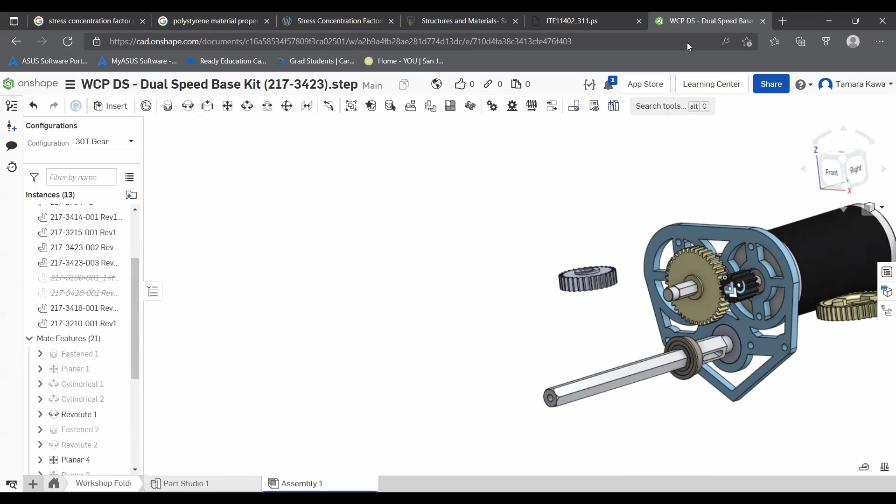Okie dokie, we are back. So you should have something that I have right now: 30-tooth gear up here, 42-tooth gear over here, bearing here, nothing there. Looks good, right? Well, we still have one problem.

You see, this gear 2 mate didn't really go anywhere, which means that when we spin these two gears, well, for one thing, they're still moving forward. So we're going to go ahead and put a little planar mate there. Let's do that with this.

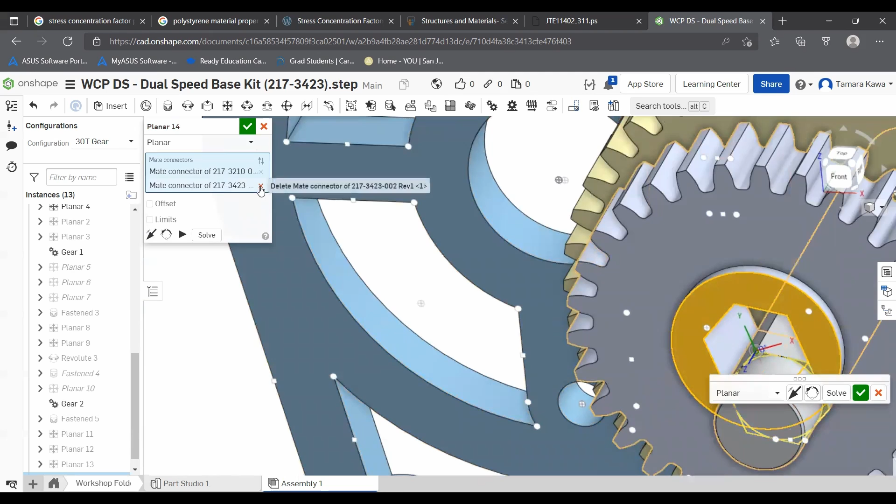No, I don't want that in that position. I want this face with that face. I want them to be planar. Okay, there we go. That's all I've asked for.

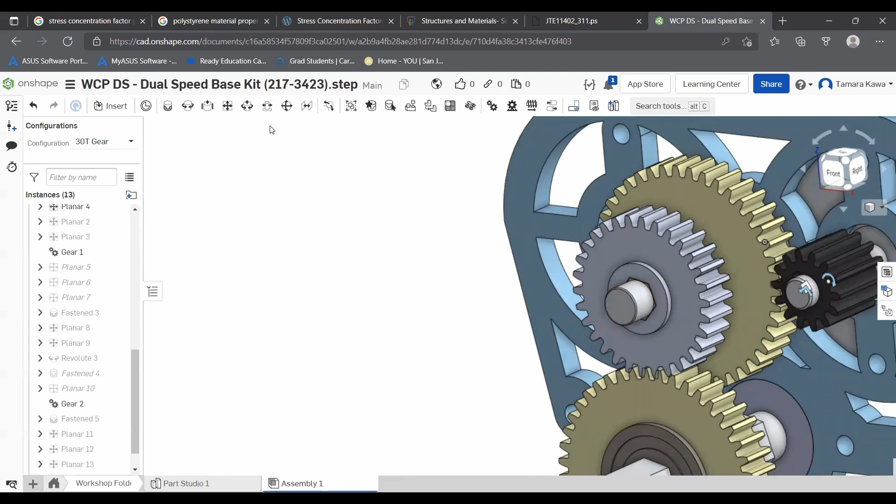So this is what we want. Yes, this is what we're supposed to have. But you'll notice still that we have this issue of gear 2. You see, this is no longer moving at the ratio we want, is it?

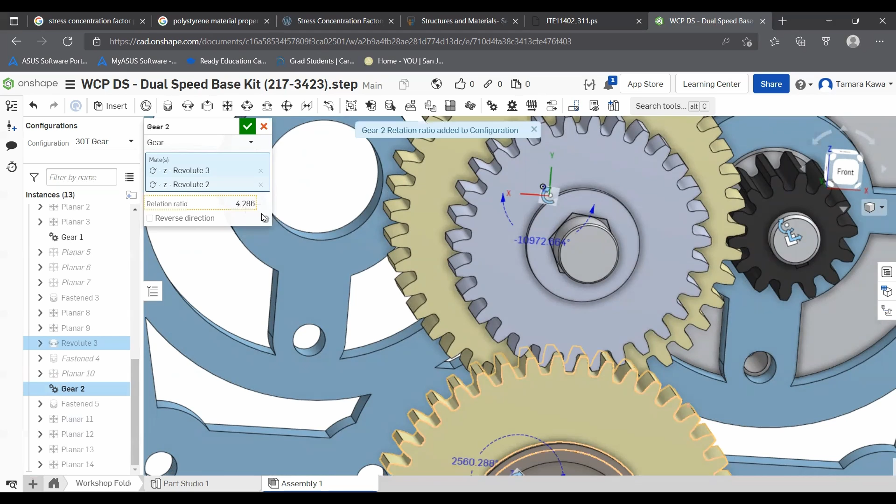Yeah, it's not. So what we're going to do is right click it. We're not going to say configure suppression. Instead, we're going to configure the relation ratio. And in 30-tooth, we don't want 60:14, we want 42:30. So, yep, we have that issue again.

This page is having a problem. And check mark that. Nice. So remember to hit the check mark, by the way, because I hit exit on an earlier version of this and it went away. So now you have something like this.

Again, the teeth look kind of off, but if you disable the mate, you can move the teeth into the proper position. Oh, see, right there. That's the happy position.

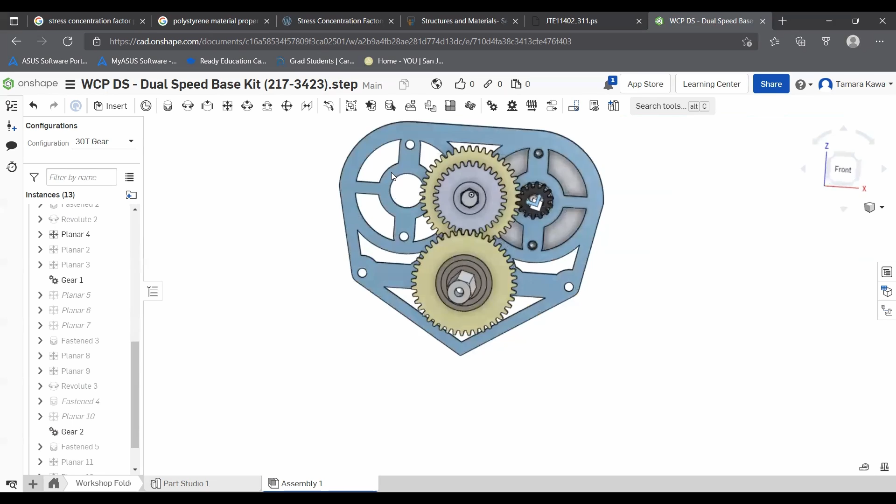So yeah, one more thing I do want to show you is that... what was I going to show you? That was mostly it, but I'm going to go ahead and show you the versions in history.

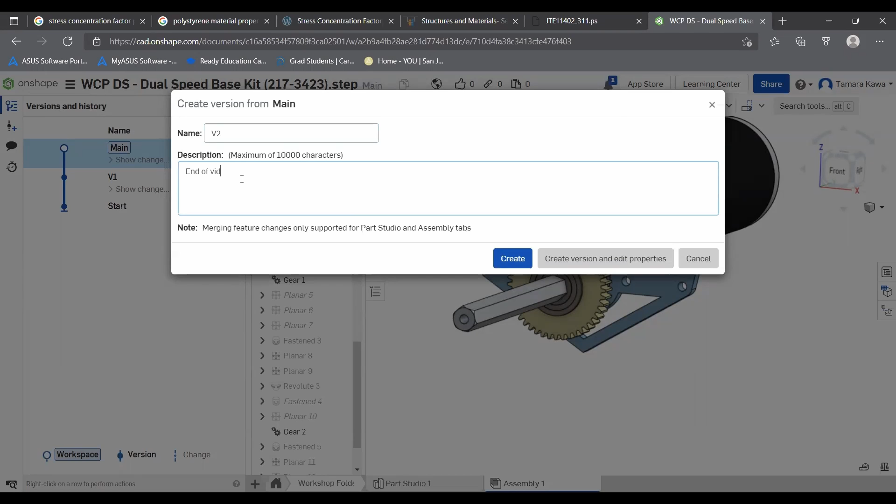So as you can see, there's kind of a version 1 that I made earlier. There's the main one, which is now. So I'm going to go ahead and create this version v2 and say end of video. And I'm going to say create.

So let's see what v1 was. V1 was just this guy. And that was done November 3. What happened November 3? Right, I imported everything. And then V2, you see all these changes here, right?

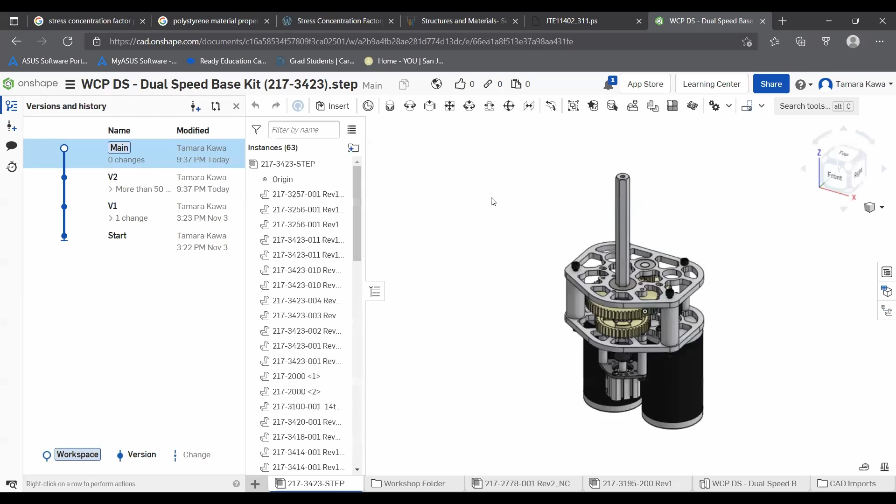And V1, the main thing you see is that it changed. So we're going to go to our main, which is everything we've created after V2. We're going to go to the workshop folder, assembly 1.

So versions are going to be really good for if there's a reason you want to go back to a previous iteration. Maybe I want to go back to a world where this assembly didn't exist. That would be a good reason to create a new version.

Or maybe I modified this gearbox plate to have actual fillets instead of these sharp corners that I am specifically telling you that you don't want. But maybe I do want to go back to those sharp corners just as a demonstration to people about how to make a gearbox plate the wrong way. That would be a good reason to have a version.

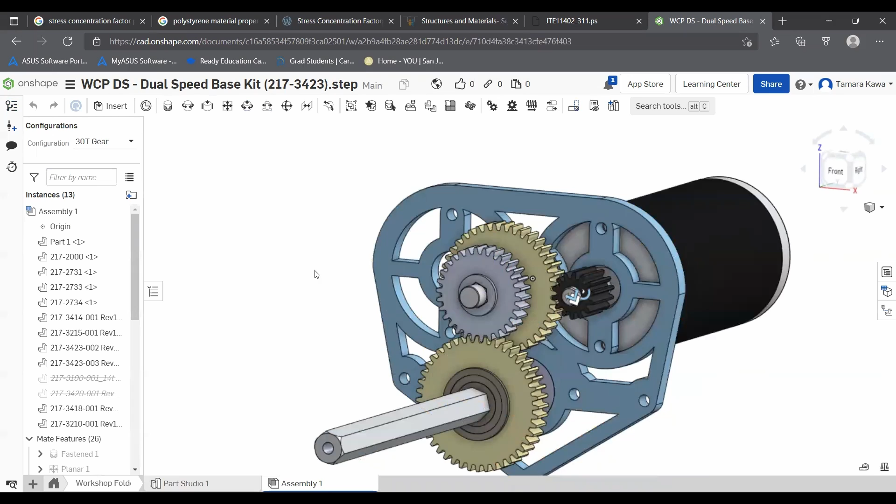So that's just the tool I wanted to show you. For now, I'm going to say that's it. I want you to get to this part of having 2 different configurations. Oh, right.

So we also need to configure these gears, don't we? So we're going to do that. We're going to say configure suppression. And for this one, we're going to say configure suppression. We're going to say configure suppression.

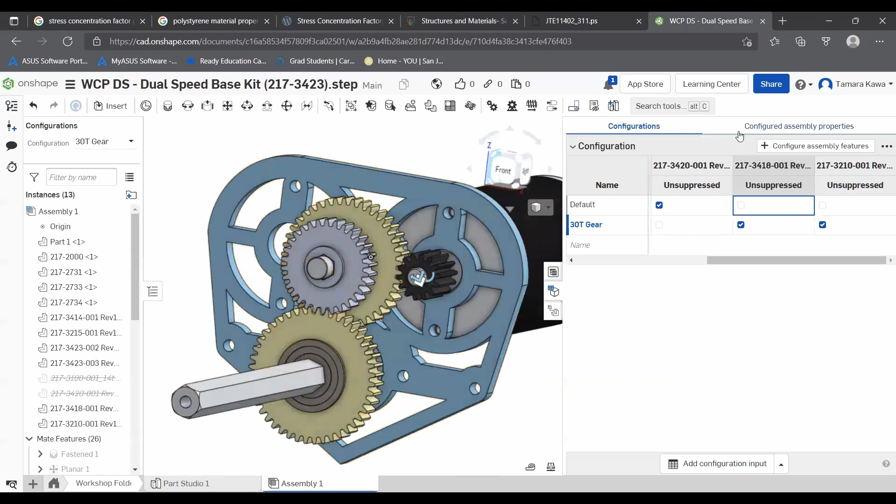So you should get to this point here where if I go to defaults, that gear kind of moves forward. And if I go to 30T, gear moves, but also so do these two gears appear. So yeah, I want you to get to this point and I want you to try to create a new version.